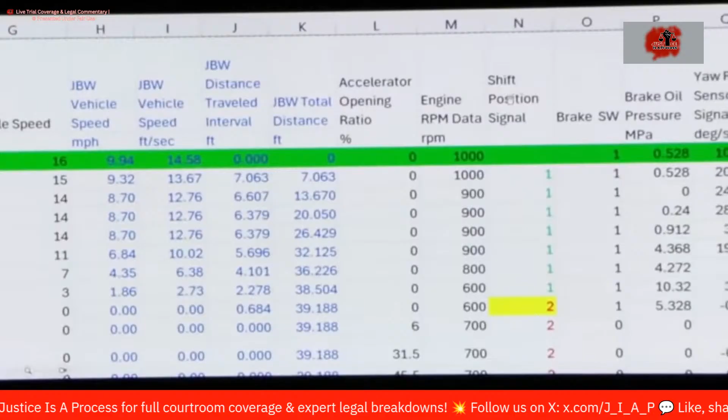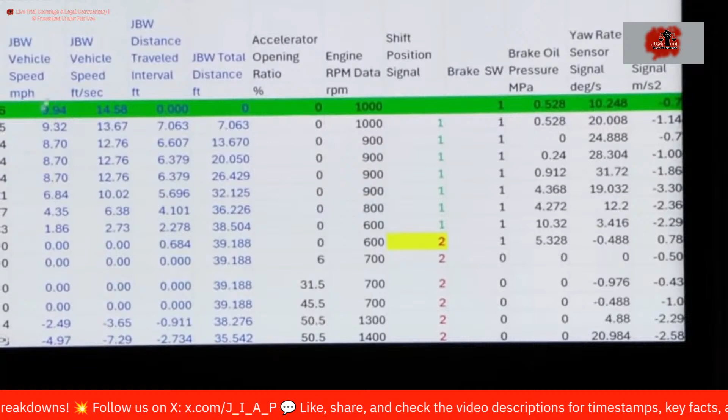Can you take us back to the data chart and show the 2 points that you just mentioned, the turning, where's that reflected in the data? Sure, so you can see... And you'll have to enlarge that, I'm sorry, Doctor. Column N, that's the shift position. So we start off going forward right here. And you can see at the start of the simulation, we're going about 9.94 miles an hour. And then as you start a three-point turn, you generally start, in this case, if you're going to the left, with the left turn.

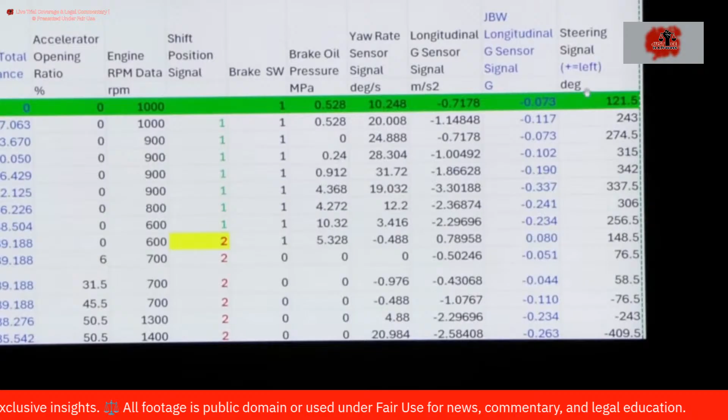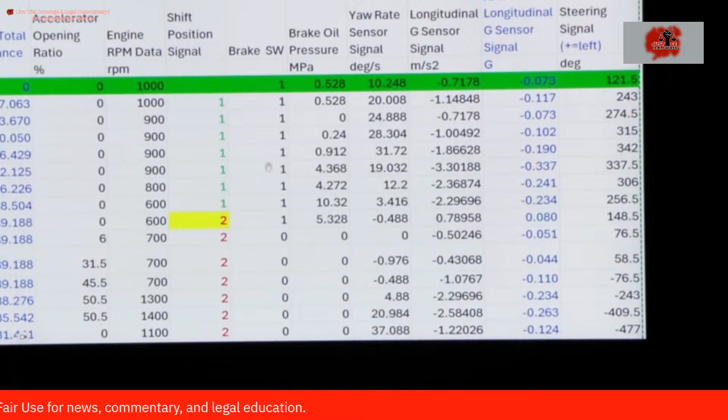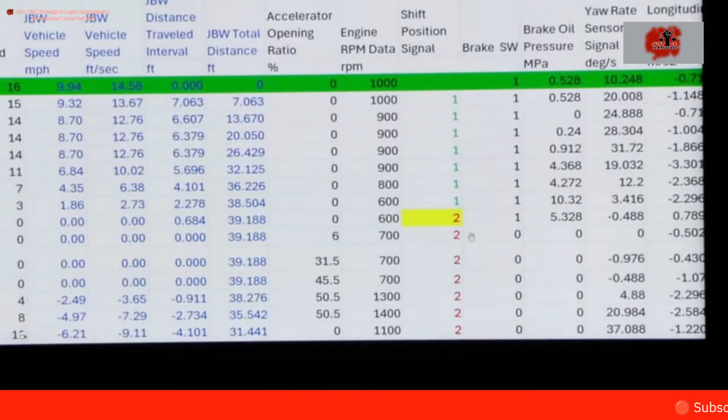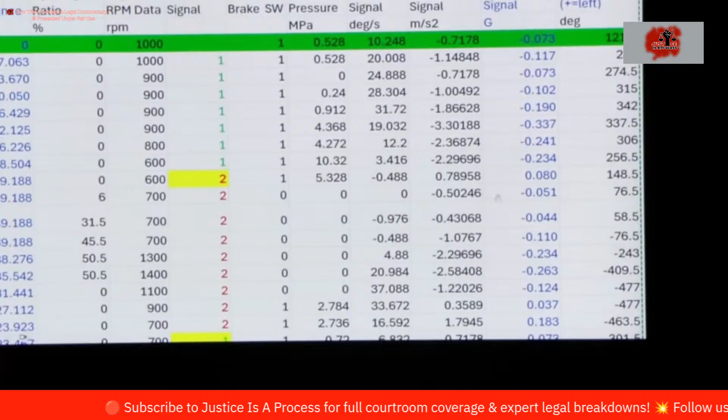You're welcome. So you can see we have this steering angle here, then the transmission. So again, we have the brake application. So you're coming in, but you're slowing down, and you get down to a speed of approximately 0. Shift into reverse, back up, and then start to turn the other direction as you're backing up. So you want the rear to go to the right, you turn the steering wheel to the right, right is negative, and then as you start to pull around and pull forward, you turn back to correct the steering, and so that's what this shows.

So again, if you put it all into a simulation program, the speeds, the shifting, the distance, keep in mind we only have that 10-second window of data, and the steering angle for that Lexus, that's what it indicates.

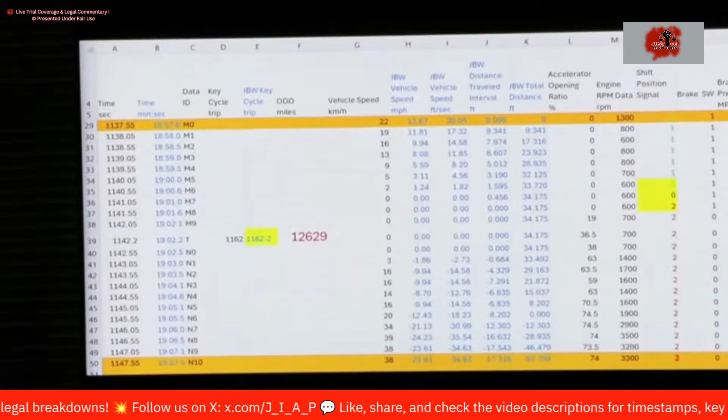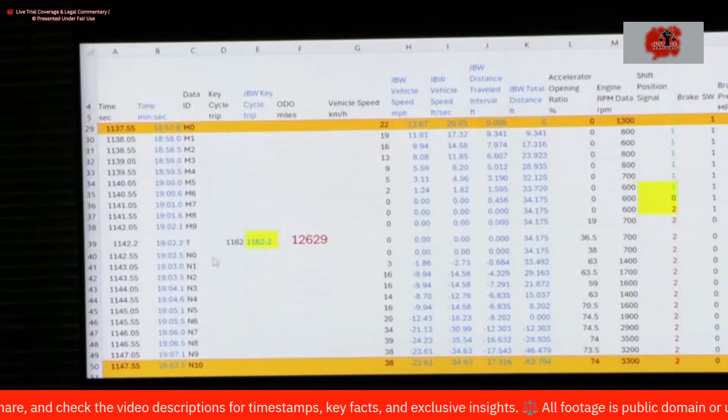So at this time, we know the ignition has been on for 19 minutes and 2 seconds. So at the trigger, 19 minutes and 2 seconds. And again, we have 5 seconds either side of that. So between 18 minutes, 57.6 seconds to 19 minutes, 7.5 seconds. Could you enlarge that, please? Which part? That part where your arrow is. You were speaking about the clock. Could you explain that so the jury can see?

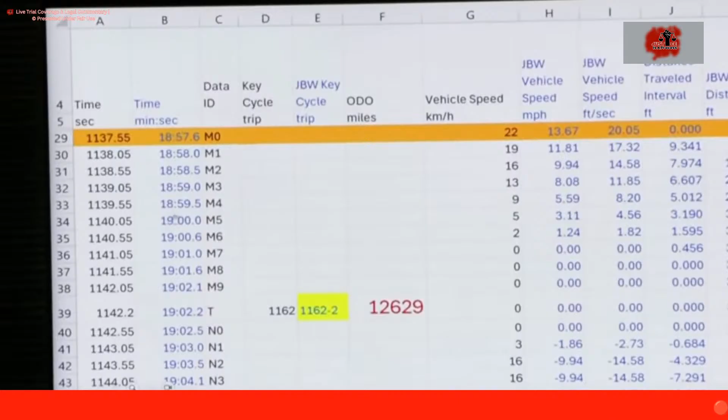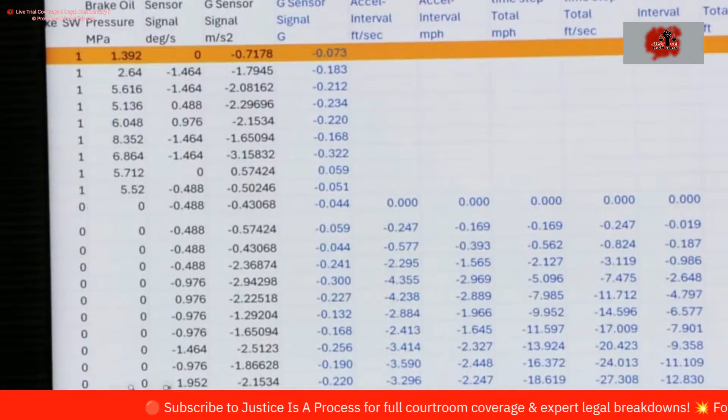Sure. So again, this is continuous from when the time comes on. I just converted it to minutes and seconds here, so you can see how long it's been on. This is the mileage. These are the speeds over here. And this is some information on how far it traveled. And we have the plus minus on the steering. That gives us some information on the steering. Really, there's very little steering going on at this point.

Slight leftward steer. Dr. Welcher, did you determine how long after the first trigger, that three-point turn, that this second trigger occurred? Yes. Three-point turn occurred about 8 minutes after. You said the three-point turn occurred after... Sorry, this event, I misspoke. 1162 occurred about 8 minutes after. After the 3-point turn. Correct. Okay, thank you. Can you walk us through this data? Sure.

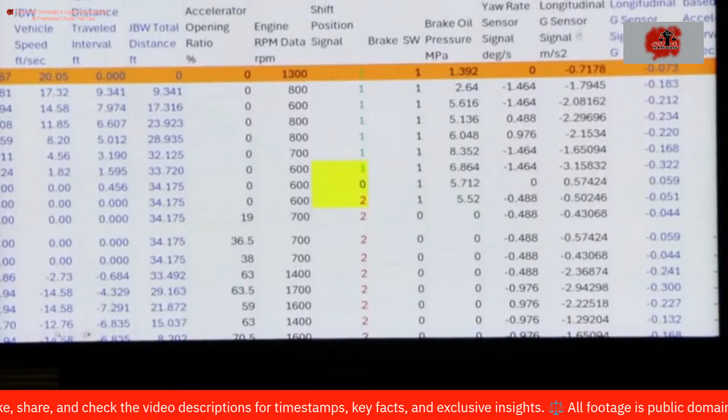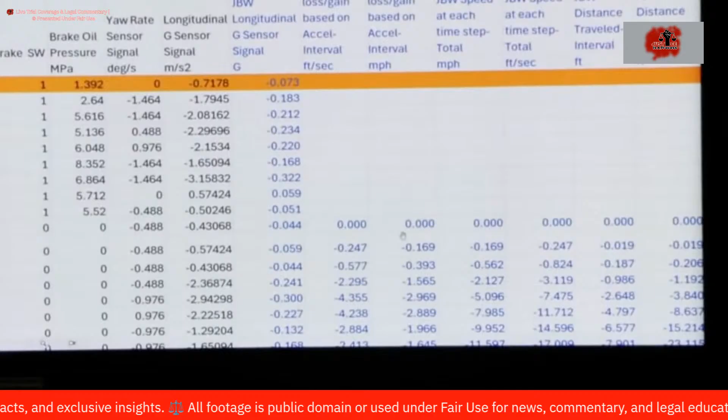Okay. So we have the accelerator data here. I've highlighted a shift from drive to neutral to reverse. I'm sorry, again, you're going to need to zoom that in so we can see it. Absolutely. We have information on the brake switch, brake oil pressure. We have the acceleration data here. And then from that information and using the acceleration data, calculating the speed at which it's backing up. The reason we have slightly different calculations here is we have some evidence that the wheel's slipping on the ground.

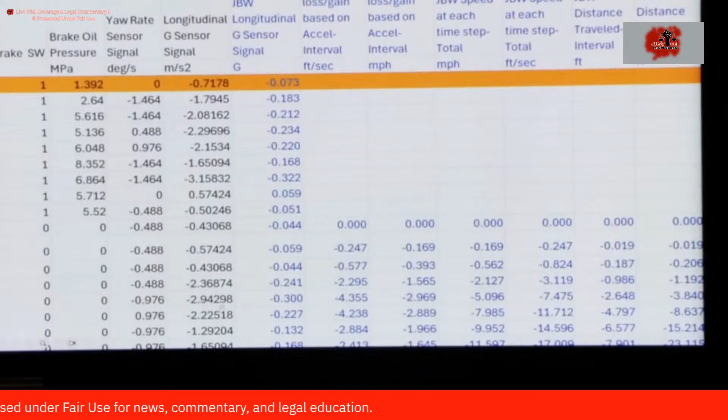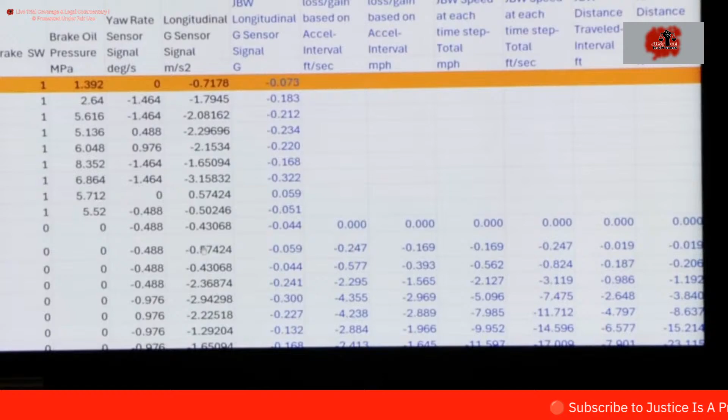So we need to use the accelerometer because the wheel speed is simply telling you the speed of the wheel. It's like if you're stationary burning rubber, the speedometer reads a certain speed, but you're not going anywhere. But the accelerometer tells you how much the vehicle's moving. So from all that information, we get information on how far the vehicle's traveled. We've done it in terms of total travel distance. We've done it relative to the start position.

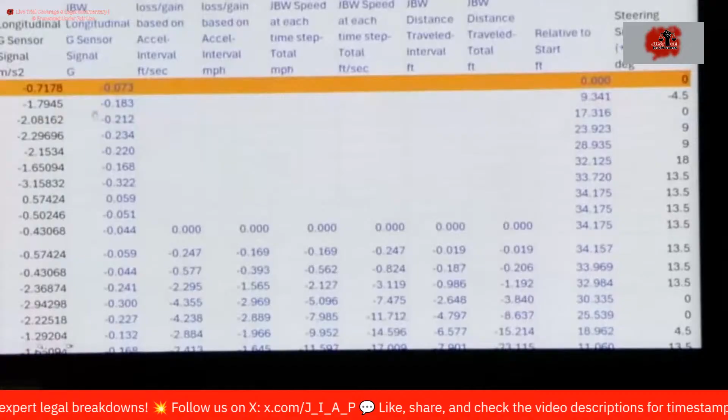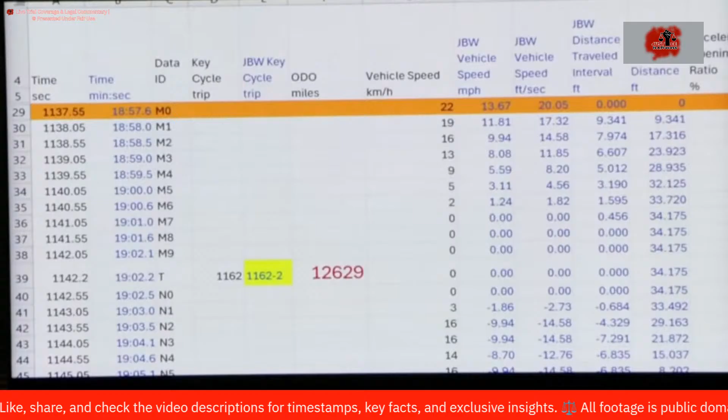I'm going to ask you to start on the columns on the left and take us through the information that you have regarding this second triggering event. So if you can scroll all the way to the left. All the way to the left? Yep. Okay. So the first column regarding time, could you remind us again what that is? So again, that's the continuous running clock. And the second column in blue? That's where I take that time and convert it to what we more commonly use, minutes and seconds. And now we have a key cycle event different than the 3-point turn. What's the number? So this is now 1162-2.

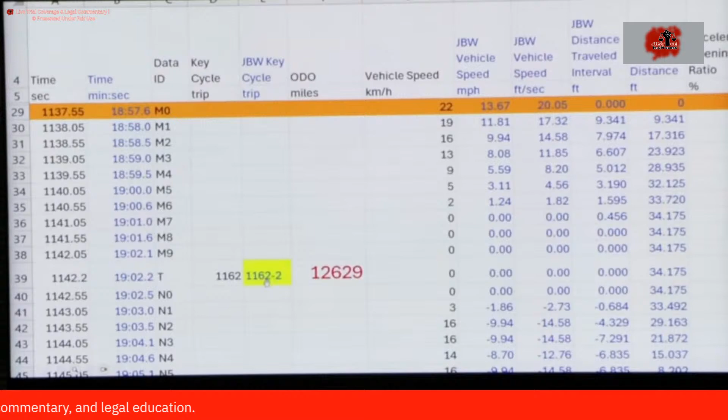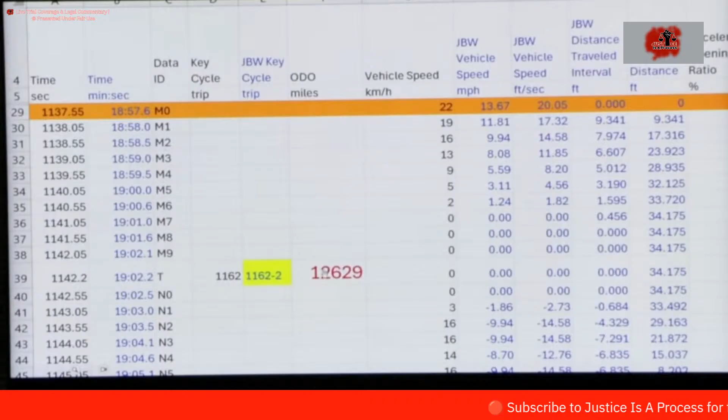And so again, it's technically in the system the same key cycle. I've called it 1162-2. And the red number next to it to the right? That's the mileage. So it's actually at the same mileage as 1162-1. So we know, obviously, they're within the same mile. If you can scroll over a couple of columns.

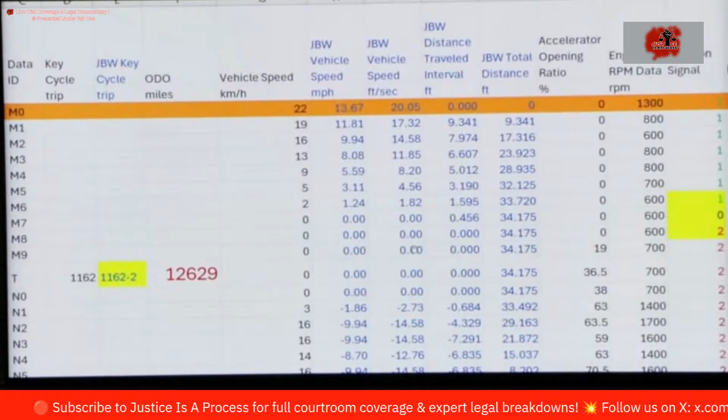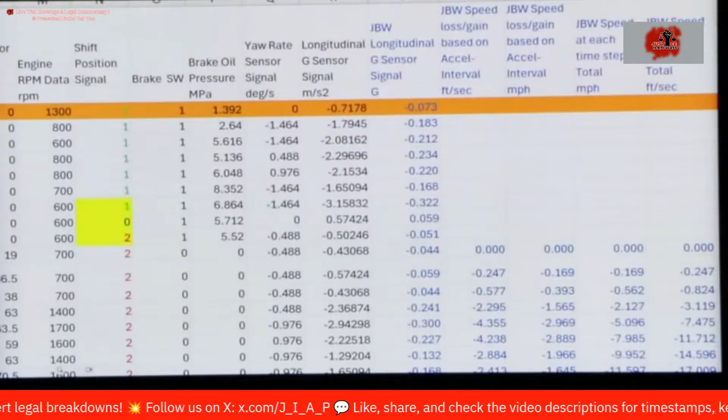From your data, can you tell during that event how far the Lexus traveled during that event? Yes. And how do you do that? So we have accelerometer data. We have velocity data or speed data back here. I go through this on a later slide, but right here you can see a significant increase in RPMs, but yet the acceleration is dropping. So if your RPMs are going up and the speed's going up, you should be accelerating more. But because the acceleration is dropping, what's actually happened is the wheel's slipping.

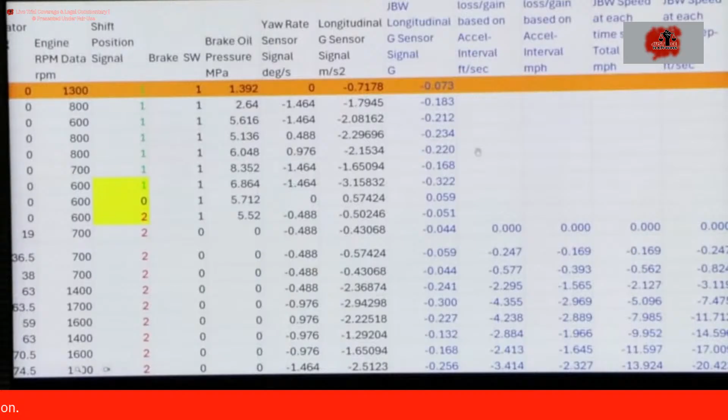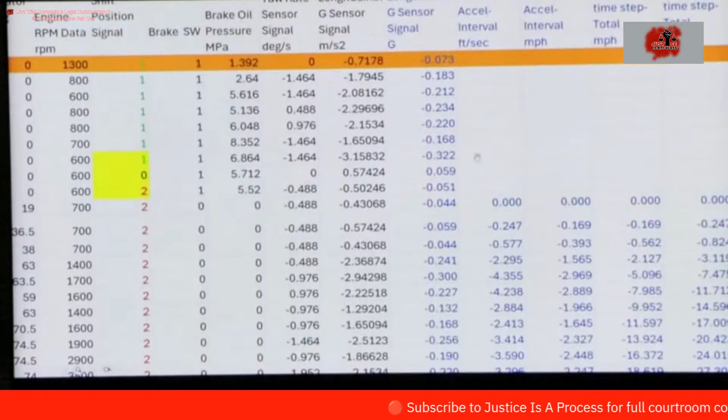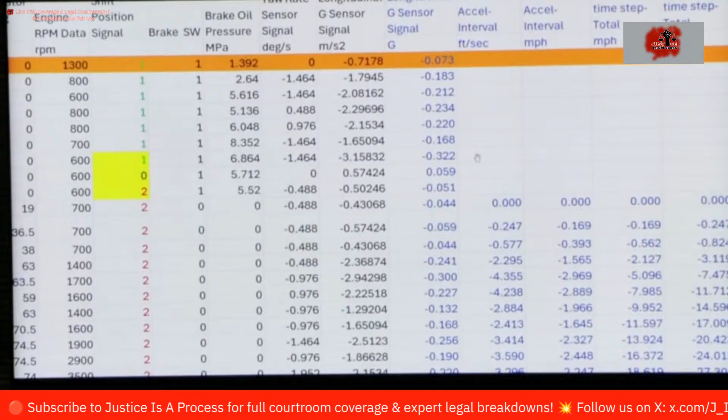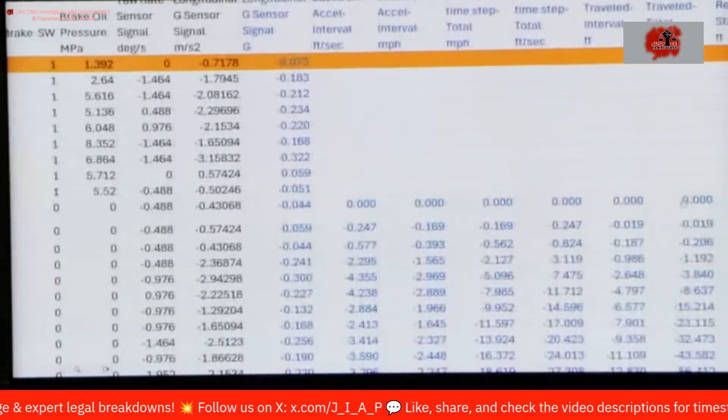So what I've done is I've used the accelerometer data to calculate the speed once the vehicle is put into reverse. And once we know the speed, again, feet per second, we know every data point is half a second. So speed times time tells you how far you moved. Feet divided by seconds times seconds gives you feet. That's how far you went. So you get how far you went in each interval, then you get the total distance traveled.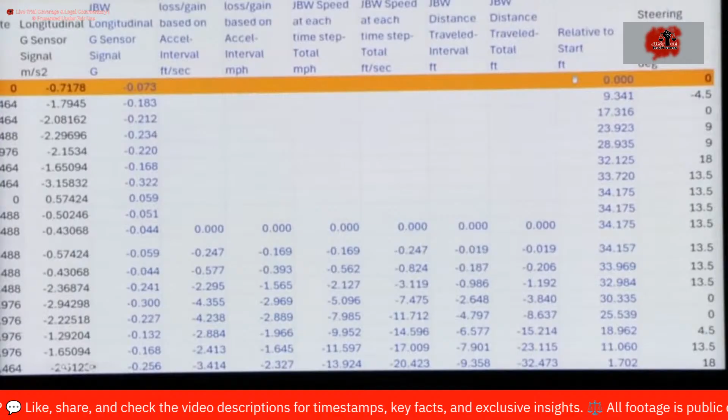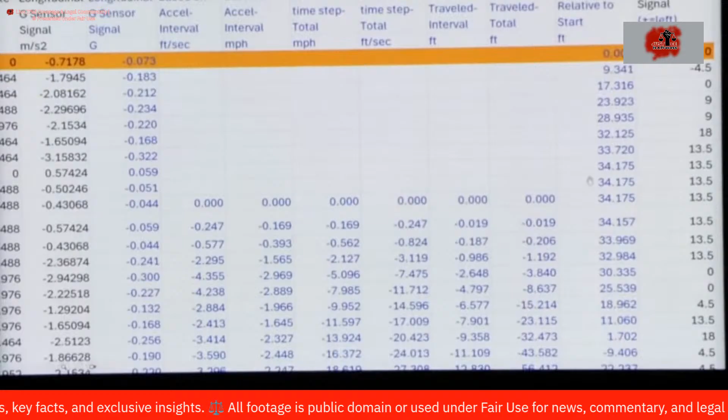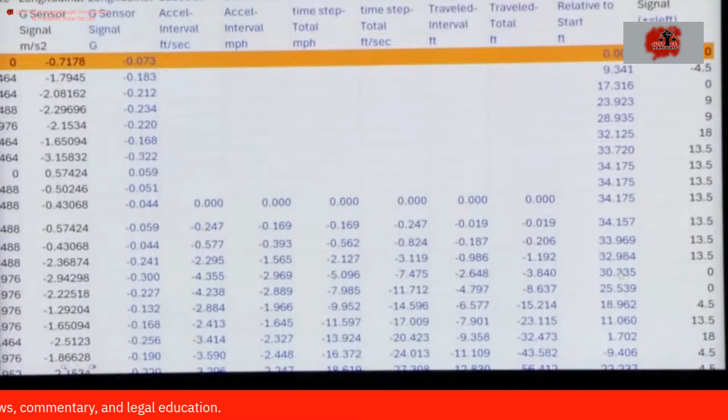And so this is relative to the start. So 0 is the start. The vehicle goes forward about 34 feet. Then you can see it basically stops in this area here, then begins to back up and ends up backing a total of 53 back from where it originally started. So if you add 53 to 34, you get 87. So the total motion, 34 forward, 53 back, the Lexus moved 87 feet total.

Dr. Welcher, when you say the Lexus moved 87 feet total, is that according to the data, or is that the entirety of the movement of that Lexus? No, that's just from when the data starts to when the data ends. When the data starts, the vehicle is actually going 13.67 miles an hour. When the data stops, the vehicle is still going 23 miles an hour. And you can still see that it's still at 74% throttle. So this is 3/4 of full throttle in reverse.

So to start with the distance traveled, if you can go to the top, we see that the speed is 13.67. Is that where the data gets picked up? That's where the first data point is. Again, the trigger is here. This is 5 seconds before the trigger. Are you able to tell how fast or slow the vehicle is traveling before that data point of 5 seconds before the trigger? No.

And likewise, on the bottom, the speed at the end of the 10-second data points is 23.61. Can you tell whether that speed stayed the same, increased, or decreased? Considering you're at 74% throttle, it likely increased. How much, I don't know. And you can see up here, she's on the brake. Down here, she's not on the brake and at 74% throttle. And what percentage of throttle has to be initiated to cause a triggering event? For a shift into reverse and a rapid throttle application, it's 30%.